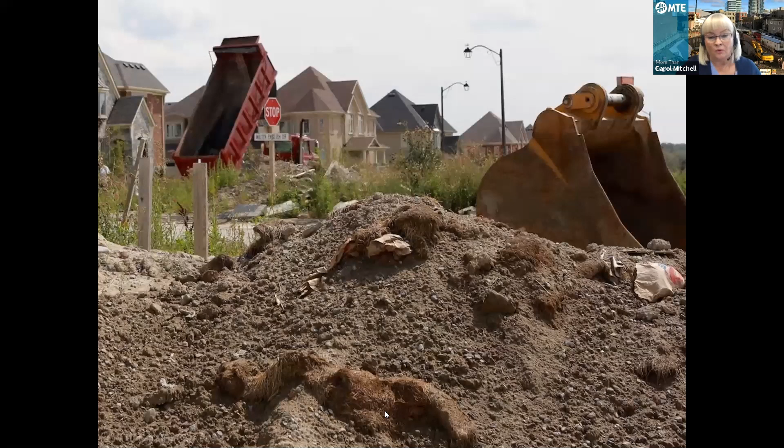So as we all know, there's a lot of soil movement in Ontario, and this law is important because we need some regulation on trying to stop illegal dumping and also to minimize truck traffic. So those are the two main concepts for bringing in Ontario Regulation 406-19 last December.

So why is management important? I'll explain some key definitions, some new general rules, some very specific circumstances, some implications, and there will be some final thoughts. And then we'll have a question and answer, as Enrico mentioned. So again, it is quite complex. We've tried to simplify it, but I'm happy to take any questions at the end.

Thank you. So lots and lots of trucks on the road in Ontario, as we all know. According to data that the MECP has, there's approximately 2.5 million trucks carrying soil on Ontario roads every year. That's a lot. And it's estimated 14% of construction costs are due to soil handling.

Unfortunately, the industry is still working in a 1960s style of handling soil. There's still, unfortunately, midnight dumping going on. Soil's being moved without being tested. A lot of last minute panic about who's got what and where can it go.

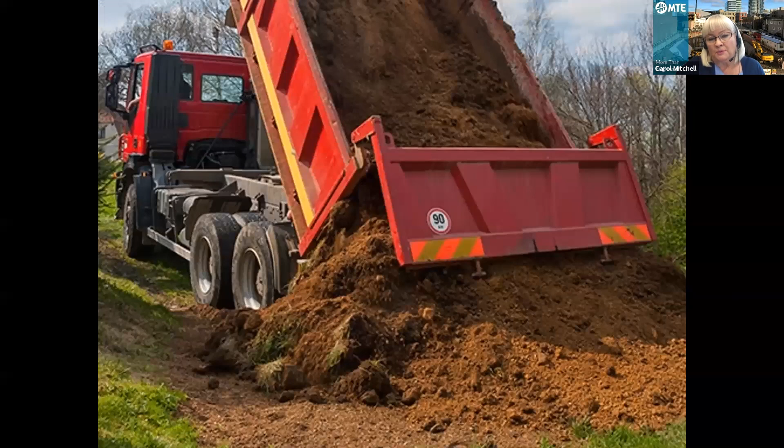So what the law is trying to promote is reuse of soil appropriately. So we have to keep remembering that word appropriate, but the ministry wants us to reuse soil appropriately, and there has to be a beneficial use for it. You can't just raise the grade of something for no reason. And we also need to consider soil to be a resource and not a waste anymore.

So why is management important? That reduces carbon footprint when it's relocated locally, protects landfill capacity. As you'll see, we won't be able to use normal landfills by 2025, after 2025.

And to hopefully prevent some of the illegal dumping that's going on within an hour's distance of the GTA and other parts of the province.

So what does it mean? What does 406 mean? It means a lot of increased project lead time. We have to really, really think about the excess soil at the outset of a project, and significant increased project expenses, administrative costs, operating and compliance. I'll get into both of these topics as we progress into the presentation.

MTE has been participating, well, personally, I've been participating in all sorts of excess soil stakeholder meetings and feedback sessions. MTE is a vendor of record to the MECP. Sorry, I keep calling them the MOE, the MECP. And since December 2019, we've gone to a lot of symposiums. I've been giving a lot of presentations. We work with our labs, and I'm also a member of the Ontario Environment Industry Association called ONEIA, and I'm on the excess soil subcommittee, along with my colleague Jen Lamke, who is really on the forefront of this new law as well.

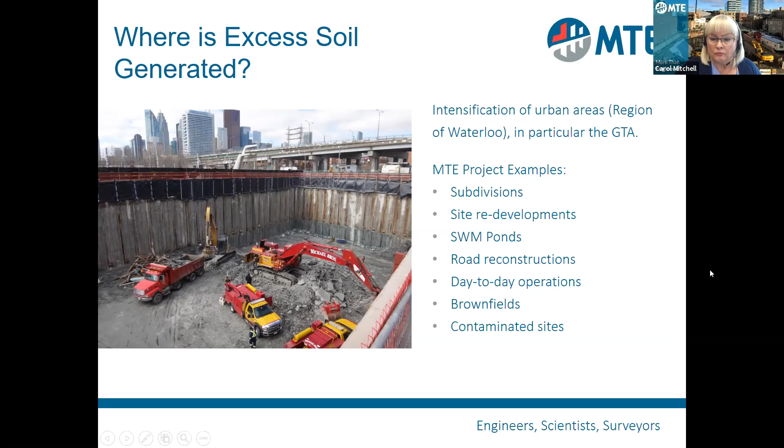So one man's dirty soil is another man's useful soil.

So what is excess soil? There's a definition in the regulation, and it is that excess soil is soil, crushed rock, or soil mixed with crushed rock that has been excavated as part of a project and removed from the project area. So project area is a new term.

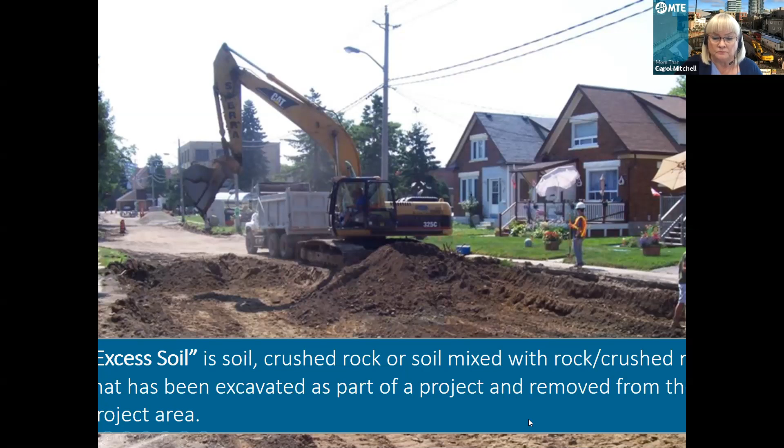So here's some of the new definitions that were brought about by the regulation. There's the project or the work area, the project leader. That's the person or entity taking responsibility for the project. They're the people that can be fined for illegal movement of excess soil. Then there's the project area or the site, and the project area can be larger than just one legal property. There's new excess soil quality standards.

So there's a whole new set of tables that we have to compare our chemical results to. There's also something called the BRAT, the Beneficial Reuse Assessment Tool, which qualified people can use to generate soil standards specific to a project area or project. Then there's a whole new companion document called the soil rules. So there's the law, and then there's the soil rules that accompany it. The new standards are in the soil rules. I think the reason they do that is so they can change the soil rules more easily than they can change the law.

So the intent of the law is to encourage reuse of soil. And I'm going to add to that the appropriate reuse of soil. On January 1st, parts of the regulation became law. And on January 1st, 2022, it'll all be in force.

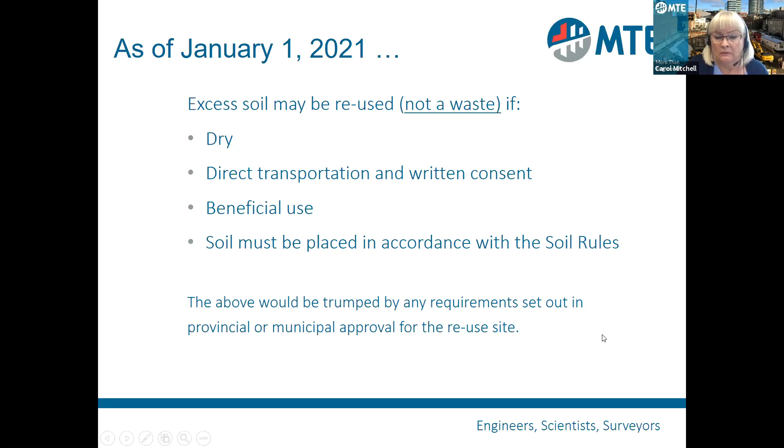So what we have for these new excess soil quality standards, there's a set for small volumes, so less than 35 trucks, or for larger volumes greater than 350 meters cubed. And there's some new leachate tables that we have to follow, and there's also some ceiling values.

So these tables are quite in depth, and you have to understand your site to know which standards to apply to your sites.

So there are, as I mentioned before, also site-specific standards that can be developed using something called a BRAT. It's like a mini risk assessment. The BRAT gives you a lot of flexibility. They say it's the best option to achieve the goals of the regulation, but you need to understand the receiving sites' development plans.

And the reuse sites still should have fill management plans, so they know for these large receiving sites, what soil type goes where.

Also, we've got some better flexibility with salt impacted soils coming out of this law. And dewatered and solidified soils, so stormwater management pond soils, also have some special considerations. That's a whole other topic that I won't get into today.

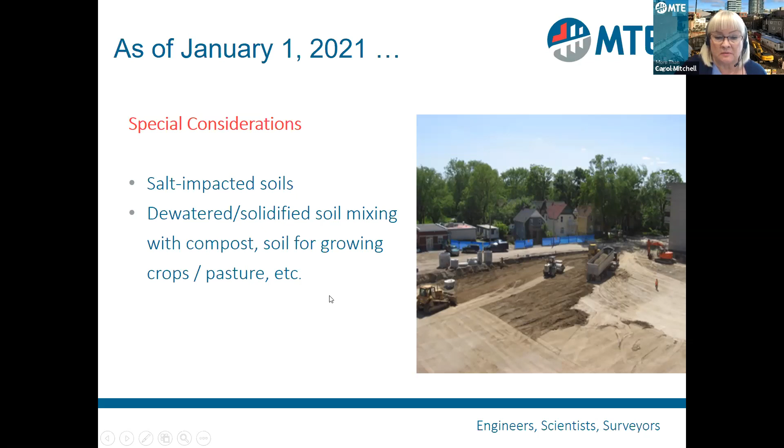But if you have questions, please ask them at the end, or I'll try to answer them at the end.

So hauling of any excess soil is exempt from approvals, but the hauler, the truck driver, needs to know where he's going and he needs to know what he's doing. He can't just be running around aimlessly with soil.

Another key, very key new definition, I guess I can say, is that as of January 1st, there are now 8 types of sites that can reuse soil. Some of them need approvals, some of them don't.

So I mentioned before, starting with the first box there, project area. You can define a project area and move from one site to another within that project area. The reuse site is what we typically think of, moving from a site, let's say in Guelph, going to Brampton. So that's a reuse site there.

Class 1 soil management sites are big soil handling sites with very significant ECAs. They're very hard to get approved. One of the big players in Class 1 soil management sites, of course, is GFL in the province of Ontario.

GFL has 8 Class 1 sites. Class 2 sites are very important for public works folks, because a Class 2 soil management site is generally managed by the municipality and can receive temporarily soil for low risk management of dry soil. They can only take dry soil, and that soil is then temporarily stored at the Class 2 site and reused by the municipality at, say, another infrastructure project. So it's coming out of a tunnel project and stored there temporarily, then maybe reused for road reconstruction or a bridge construction.

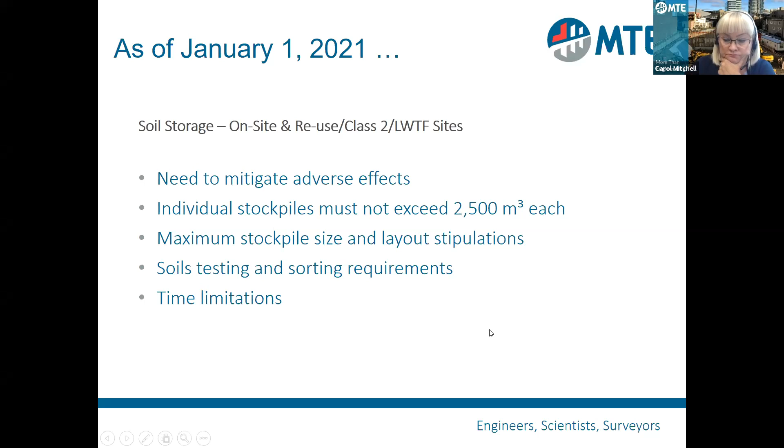So here we get to next year, January 1st, 2022, the big day. The registry—everything goes public. QPs need to sign off on things. I'm a qualified person under Ontario Regulation 153/04. Qualified professionals are people who are engineers or geoscientists.

So as of January, we have to start thinking about what needs to go on the registry, if I do need to register my project. There's a lot of planning that has to go into determining whether my project needs to be publicly registered. I believe there'll be a cost to registering too.

So if no, you still have to follow the due diligence approach. You still have to think about, okay, is it appropriate what I'm doing? What's the quality of my soil? I'm going to take it to this other site—do they know I'm bringing it to them? Have they agreed? What quality of soil do they need?

But otherwise, if you have to register, it's very formal. Again, we haven't seen the registry yet, so I don't really know what kind of information they're expecting to be uploaded. It's going to be quite hairy. Apparently there's a beta testing of the registry coming this fall.

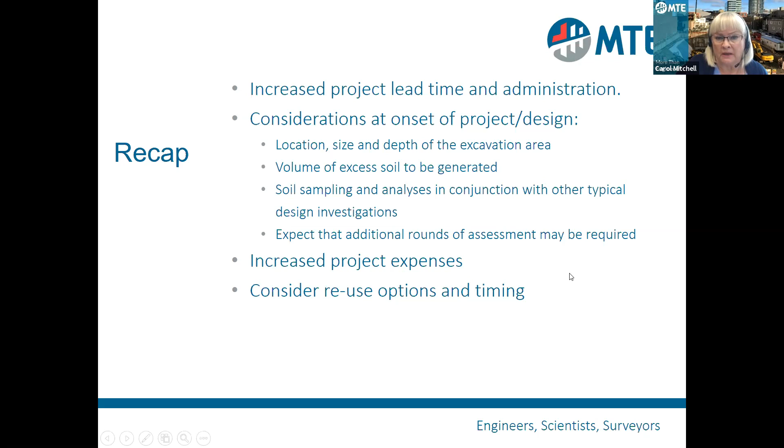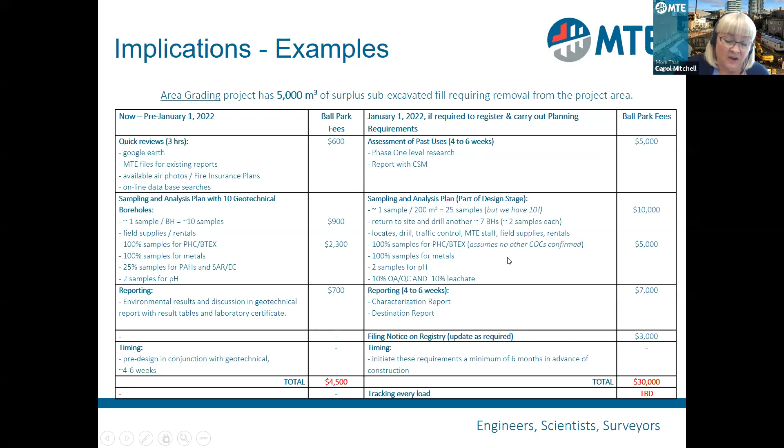So key takeaways and some of my final thoughts. The mandatory requirements started in January already, and there's a lot more to come this January, specifically the registry when things become public. That changes my world, because right now my work is with my clients and the public doesn't necessarily see any of it.

Environmental considerations will be unique for each and every project. What we really need to stop and think about is: I've got some soil I need to get rid of. Will it be impacted? Could it be impacted? Was there a gas tank nearby? Was it in an industrial site? Is it in a road? What's nearby? What could be there? Is it a farmer's field?

So then you have to start considering what would be the appropriate reuse for some of that soil. How do I easily move it to a nearby site where it can be appropriately reused? So it's very important to start thinking about any excess soil not as a waste anymore, but as something that can be reused by someone appropriately.

And a big one for some of our clients is this grandfathering clause. If you have big projects that are going to generate a lot of excess soil, like the City of Hamilton for their new wastewater treatment plant, you start testing the soil way in advance so you can at least be exempt before January 1st, 2022.

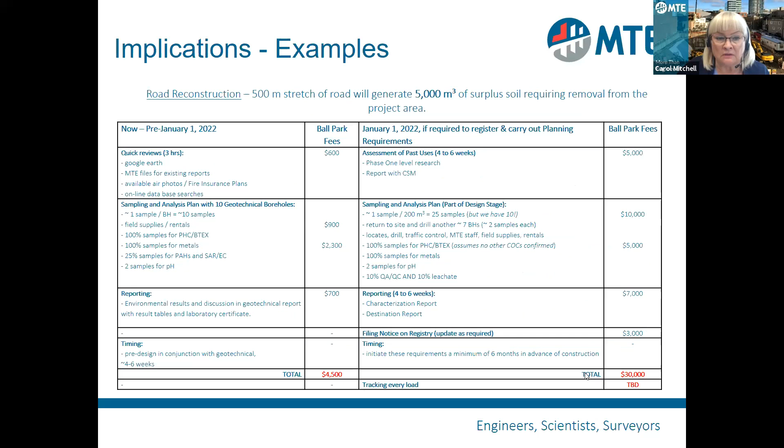Okay, here's a question, Carol, that I believe you addressed, but maybe just repeat the information. Is there a specific volume where the project, okay, yeah, I'll just read it as is. Is there a specific volume where if the project is excavating below, the new OREG won't apply? Yes, I think earlier in the presentation, let me just get that exemption for small projects, small quantities. But I don't know if you can still see my screen.

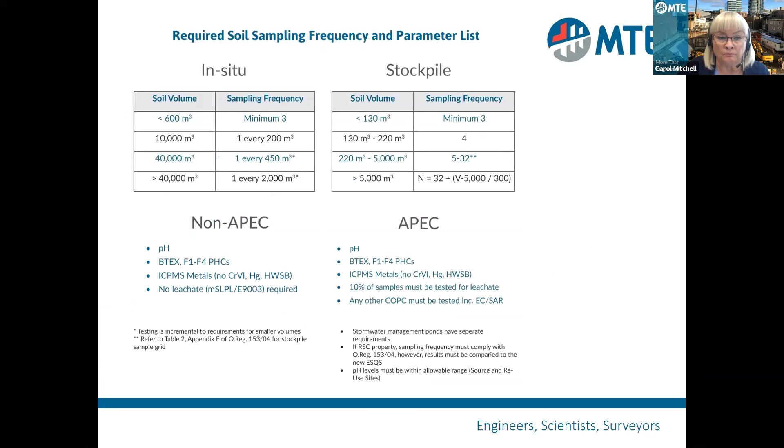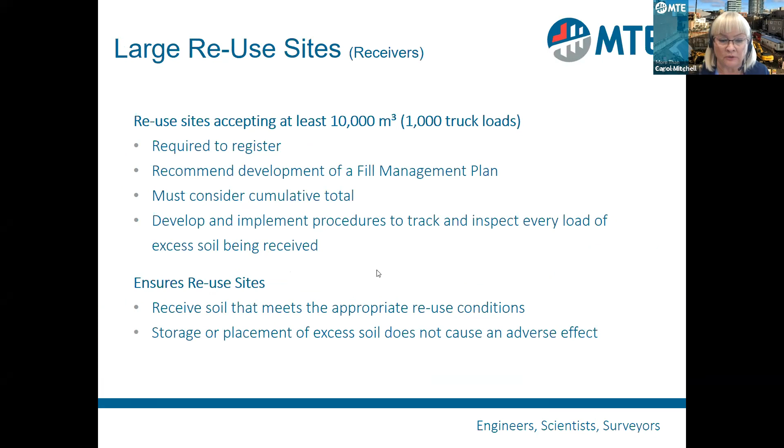Yes, we can. Small quantities, maybe this could be a question for my right-hand man, Jen Lamke, who's awesome. Jen, I don't know if you want to just get into what we're calling small quantity, I know it differs. Sure, I'll jump in. 2,000 cubic meters seems to be the main, the magic number, if it triggers registration or not. Some of the exemptions do include smaller numbers, like if you have 100 cubic meters or less and it's going directly to a local waste transfer facility, that's exempt. But 2,000, if you want to use that number as a general rule. Thank you, Jen.

Okay, and just to circle back to the topsoil question, topsoil, my understanding is it does have a very specific definition. I want to say the Municipal Act, I don't want to misspeak, but we can definitely give you a specific definition for topsoil. It's some volume of or percentage of organic matter or something.

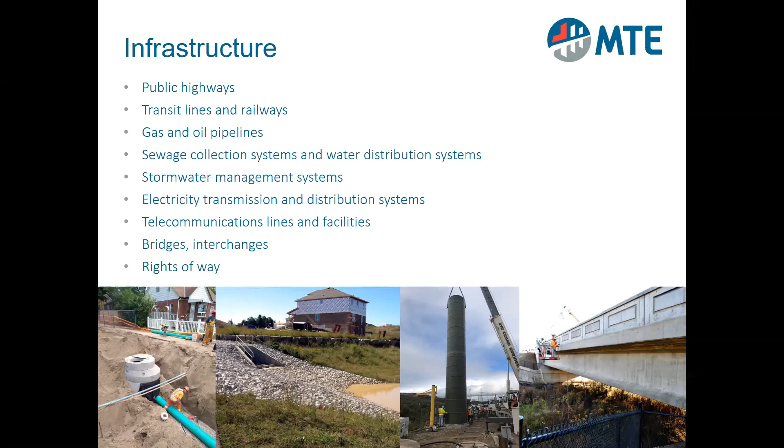Okay, here's a second question: would registry be required for each project or each site? And yes. Would the owner be required to register, or the contractor who is moving the soil? The owner, yes. I'm just being very general here, there are a lot of ways of getting out of registering, perhaps, since each project is unique. But if you do need to register, it would be the project leader, and the project leader is usually the owner.

Okay, as we continue on, Carol, we're getting some great feedback with great information on this presentation, so everybody's enjoying it. Here's a question from Brad: who would determine or approve disposal of an appropriate reuse?

So I work as a QP for both source sites and receiving sites. The receiving site's QP would say, yes, I'm a residential subdivision, I want soil that meets table 2.1 residential. So if you go into those new tables I talked about, you'll see the different types of property uses: parkland, industrial commercial community, or residential institutional. And as the owner of the final resting place for the soil, I determine, or the QP working for that owner determines, what maximum soil quality they can receive. So they can always receive table 1. Table 1 can be used ubiquitously in the province of Ontario, but they may want to up that because finding table 1 soil can be difficult.

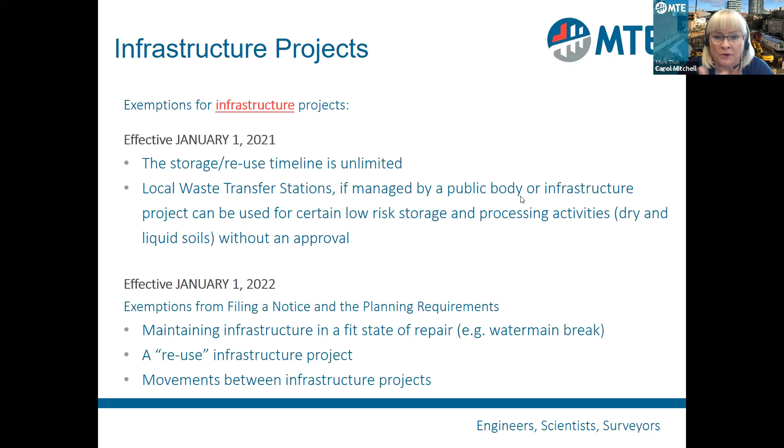Okay, I guess I've been exposed to a little bit of this in my sector of industry, and my real simple take on it is, if you can minimize excess soils, that's more to the benefit. Absolutely. We're saying to our large clients who develop cut fill balances, because now we're in the region of Waterloo, where I mostly do a lot of work, we're getting to the lumpy, bumpy parts of the province where it's not as easy to develop. So we're asking our civil engineers to really tighten their belts on their cut fill balance and not generate any excess soil, if they can. I mean, topsoil usually has to come off.